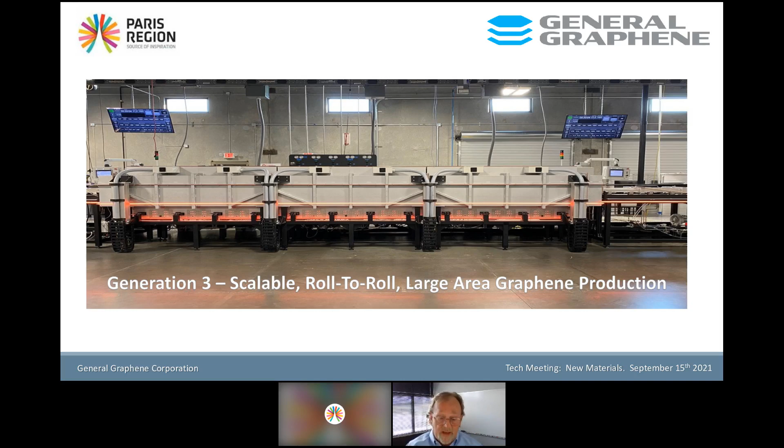The last part about this is notice that it's composed of identical sections. Every bit of this is full custom, fully designed by ourselves, with a tremendous amount of IP and intellectual secret sauce associated with it. This was our first production machine, and we are actually now producing graphene for other companies.

I'll end with this short presentation — again, I am the president and CEO. We are very well funded, in really good shape. We have a lot of customers and we're growing somewhat exponentially. We are looking for companies interested in using our graphene. Our graphene can be used in everything from barrier films to Band-Aids to pharmaceutical products to anti-corrosion coatings to proton barriers. There's a tremendous number of properties it could be used with, and we are entertaining customers as we speak. That's it, thank you very much. If you have any questions, please get a hold of me at the end.

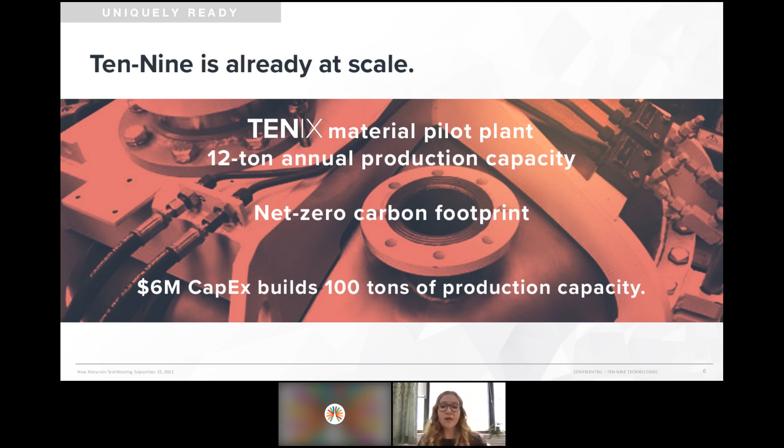We're currently having our life cycle analysis done by a UK company, and soon we'll be able to officially stamp that we're the world's first carbon neutral battery materials, largely because we use a much lower temperature profile for production of the materials than is typically used in the cathode industry.

So that's where we are: scale to tonnage production, and making that shift in development from the application of our materials in the single-use space, manufacturing and integration there, to moving that development phase into the mobility space. We're currently raising a $30 million Series B for production and EV market entry. Really pleased to participate in this new materials conference, and open to any questions.

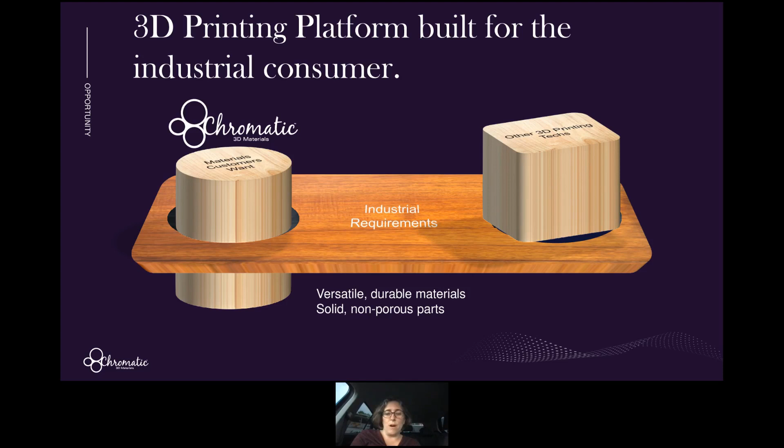We want to provide the materials and the shapes and the geometries and form factors that are really desired by industrial consumers to really help drive the growth of 3D printing into industrial markets. If you move to the next slide.

Our team is based in Minneapolis and in Germany. We have 12 people split between chemistry, additive manufacturing, and software. Many of us come from the materials industry, and we really understand what drives material selection and why among industrial consumers. Our headquarters are in Minnesota.

If you go to the next slide, please. So the problem that we're solving, and the problem that 3D printing has the potential to solve if we can provide materials that can really perform in industrial applications, is one of the global supply chain. We call this the global supply chain insanity.

The reason why we have so many supply chain problems that pop up, with accidents like a barge getting stuck in the Suez Canal, is that global mass production is really cheap. When you have specializations around the world where an individual company is able to make one widget really, really well, and then ship it around the world, this can be very low cost. And that's what we've gotten to. But the problem is that when that gets disrupted, the repercussions are really felt throughout the world.

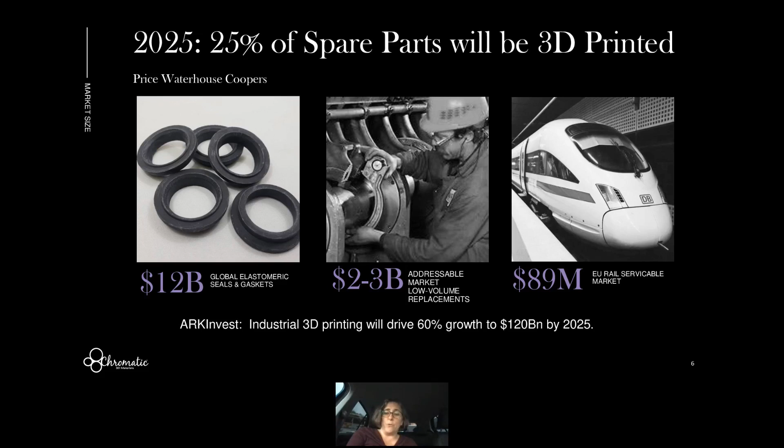The European rail serviceable market alone, once we get all the qualification requirements for Deutsche Bahn passed, and we're well on our way to do that, is a $90 million market right there. And industrial 3D printing overall is projected to grow from its current state of $15 to $20 billion to $120 billion in just the next few years.

Some examples of customers we're working with besides Deutsche Bahn include the US Navy, working with companies on remote part distribution, and a number of customers in textile printing, where you can create different forms by applying 3D printing technology on top of textiles. These are just some of the applications we're pursuing.

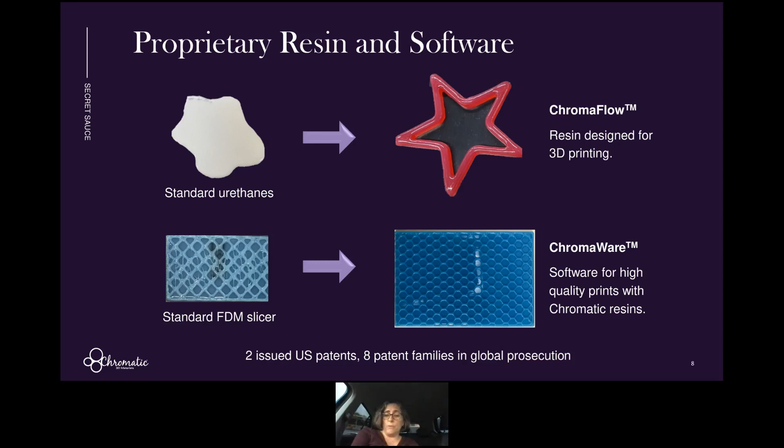If you tried to print with our materials using a standard printer and standard software, you'd get a messy print like you see on the lower left. We bring a lot of software development that allows us to have high quality prints with our resins, so we really bring that combination of software and resin. All of that is claimed along with the printing methods in our proprietary technology.

We're working on a $5 million Series B, with our initial close happening imminently in the next few days. Our lead investor is Embedded Ventures. The syndicate is put together, but we still have some openings if people are interested. Prior investments to date have been $4.5 million, coming from a combination of a National Science Foundation grant, equity, and convertible debt. With the Series B, we're going to expand the team, ramp up our operations and sales, and continue our technology development to get faster, better, and stronger.

Overall, we really want to help our industrial customers innovate with our technology and 3D printing. I look forward to answering any questions. Thank you.

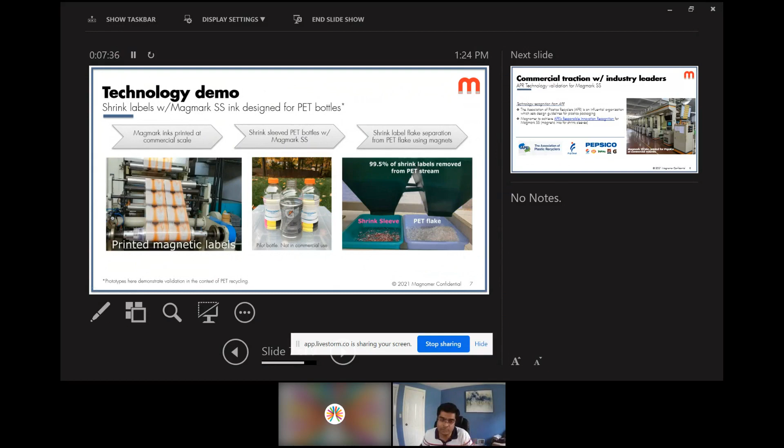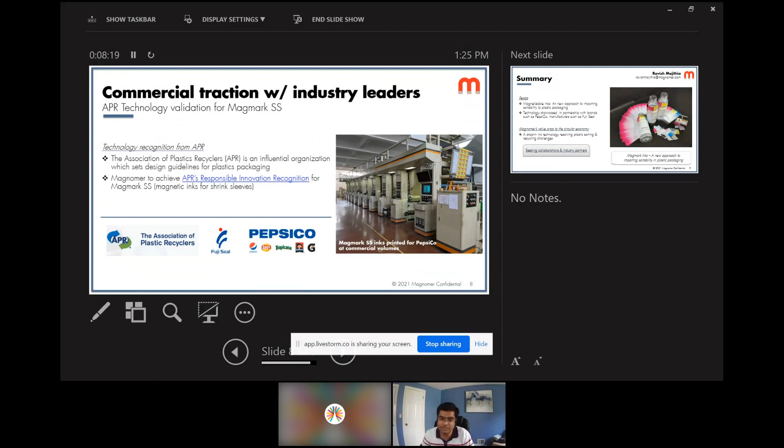This technology is already patent pending and has been recognized by the Association of Plastic Recyclers here in the US. The APR is an influential organization which sets design guidelines for plastics packaging. Magnomer is achieving the APR Responsible Innovation Recognition alongside our customers PepsiCo and label manufacturers such as Fuji Seal. This triumvirate of stakeholders in the industry shows the efficacy and importance that such sorting, and the value proposition that Magnomer ink technology, brings to the market.

To recap, Magnomer is introducing a new category of inks into the packaging market, enabling a circular economy and a more sustainable value chain for recyclable plastics. With that, I'd like to close off, and thank you very much.

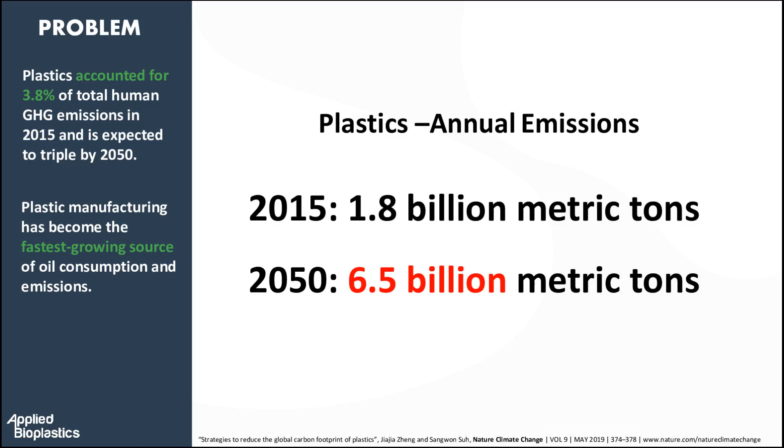In 2015, plastic production accounted for 1.8 billion metric tons of CO2 emissions. If projections hold, emissions will reach 6.5 billion metric tons per year by 2050, over 15% of the total human carbon budget.

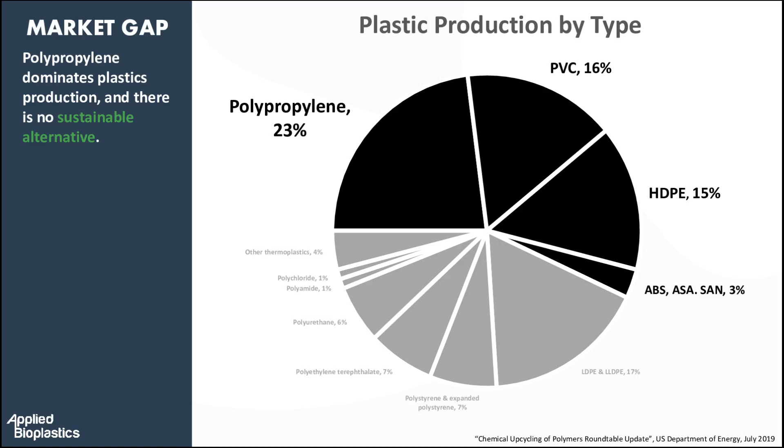Of particular concern are durable polymers, which make up over half of all plastic produced annually. Yet most alternatives are focused on the plastic waste problem, primarily reducing single-use plastics like LDPE and PET with expensive and biodegradable alternatives, which we're a huge fan of, but which also leaves a major hole in the sustainable plastics market.

At Applied Bioplastics, what we do is we make bioplastics for durable goods manufacturers that are cost competitive, mechanically identical, globally scalable, and most importantly, vastly reduce net carbon emissions.

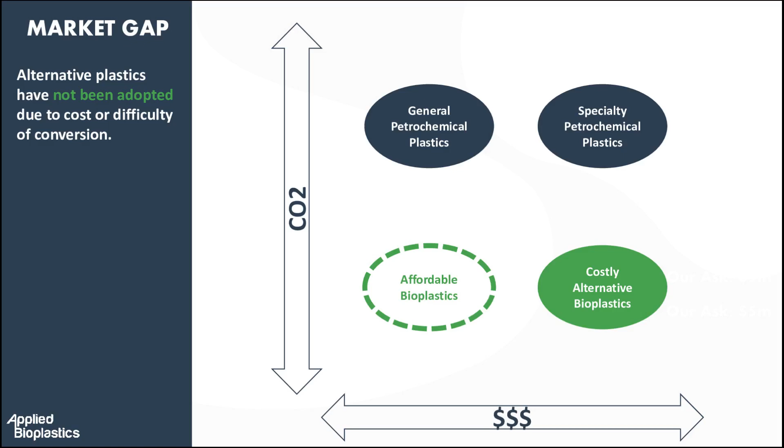We do this in several ways: reduction of petrochemical inputs, carbon sequestration in the soil, carbon sequestration within our durable composites, and by diverting waste biomass from being burned and composted.

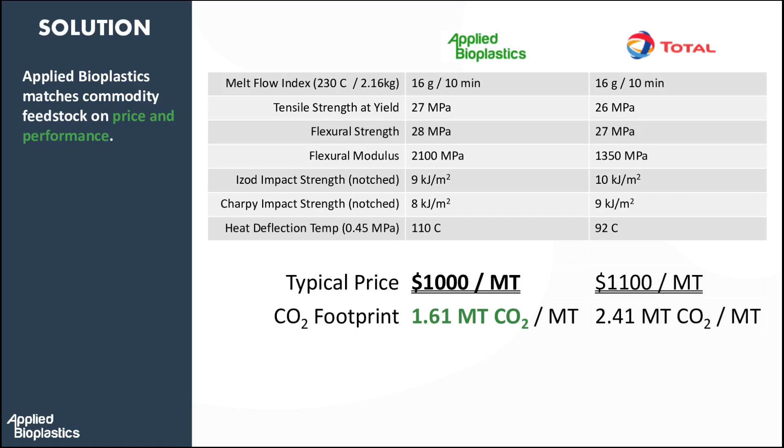We're able to compete directly with legacy plastics on price because we use abundant, renewable, and most importantly, inexpensive and globally available plant material. This is possible because we have achieved a major breakthrough in cellulose processing.

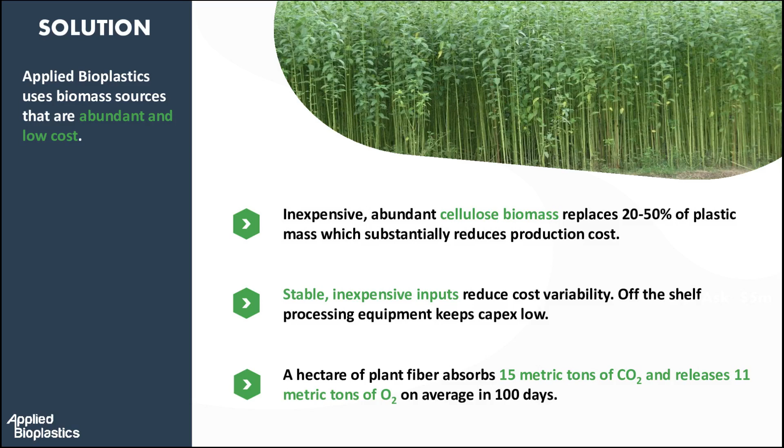A low capex proprietary technology allows us to use cellulose from nearly any kind of fast-growing fibrous biomass, which is revolutionary. Anything from processed hemp to agricultural waste to lawn clippings, we'll take it all and turn it into usable, valuable plastic composites.

In the last 2 years, we've secured our IP, competed in and won several well-known business competitions, including South by Southwest and Mass Challenge, built a team of 20, and begun acceptance testing with some of the world's largest manufacturers.

At scale, we'll be reducing the CO2 output of manufacturing by hundreds of millions of metric tons, and further product improvements like using recycled or ocean-recovered plastic will push those gains even higher.

Better yet, we'll be meeting multiple UN SDGs by empowering rural communities and emerging economies by purchasing both farmed fiber and agricultural waste at fair trade prices.

We're confident in our success because our process and our products were built from the ground up to be drop-in replacements for both feedstock manufacturers and their customers.

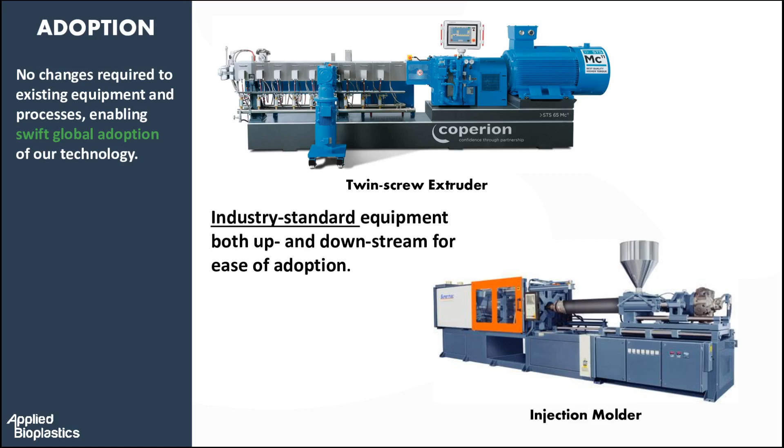We're engaged with half a dozen manufacturers in the Fortune 20, as well as with several other household names responsible for big chunks of the total plastic manufactured annually.

By 2030, we plan on delivering nearly 5 million metric tons and helping manufacturers avoid over 4 million metric tons of carbon emissions.

Out of a total annual addressable market starting at 120 million metric tons, and this is only polypropylene, our first product, we do expect to claim a 1.5% share by 2025. Delivering on that market share allows us to generate significant profit rapidly.

Over 5 years, we'll accumulate over $230 million and be generating over $130 million in profit annually. And that's before we get to other materials.

We are working on a joint development agreement to create a PVC composite using the same technology, and we are definitely looking for new partners now and today, looking for other polymers that our platform can be extended to.

Our strongest asset beyond our intellectual property is our team, with a century and a half of experience in plastic, 5 PhDs, experienced business and sales leaders, and of course, what every good startup needs, a bunch of talented youngsters dying to make a difference. We know that what starts here is going to change the world of manufacturing.

After 2 years of work, we're months away from capturing our first revenue from some of the largest brands on the planet. Supplying only 2 to 3 of these customers can bring us to that 1.5% market share within 5 years, which equates to that $230 million in annual revenue.